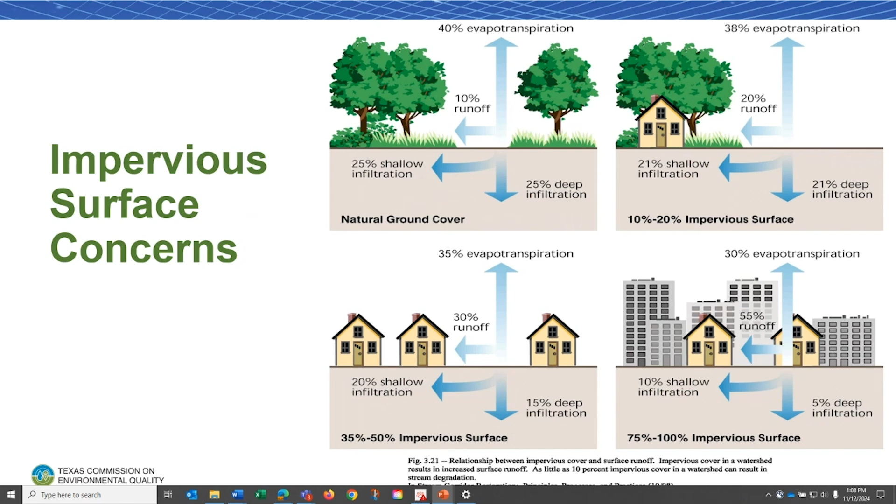So specifically, the stormwater program that we are dealing with right now is the MS4, which stands for the Municipal Separate Storm Sewer System, or MS4. MS4 is a publicly owned or operated stormwater drainage system designed to collect or convey stormwater. It includes drains, ditches, curbs, gutters, municipal streets, and roads with drainage systems.

The federal regulations are in Title 40 Code of Federal Regulations 122.26B8, where you specifically find the regulations regarding this program. Other terms you might hear refer to are MS4 operator or within the MS4. Within the MS4 is the specific area located within an urban area of 50,000 people or more. We'll go over that in a little bit more.

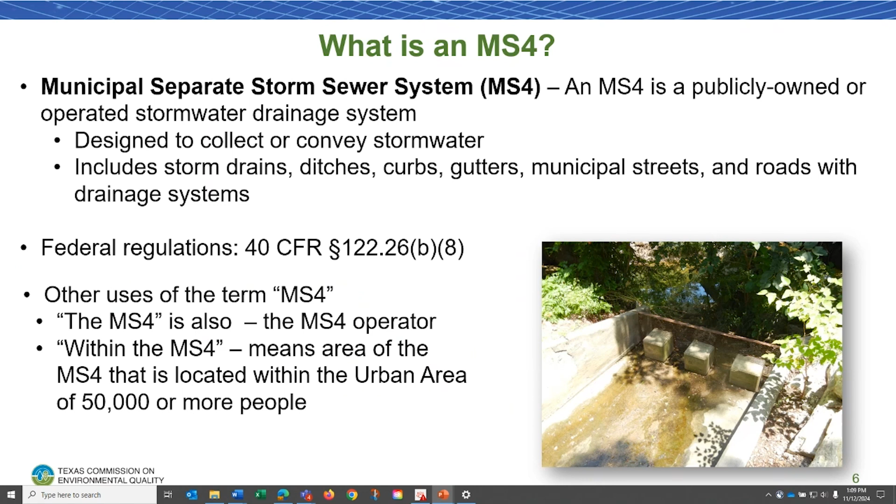We have two phases in the MS4 program. We have phase 1, which we're not going to be talking about here. We're going to be focusing on the phase 2 program, which came into play in 2000. So in order to be regulated under the 2024 phase 2 MS4 general permit, or the TXR040000, an MS4

must be publicly owned or operated, designed or used for collecting or conveying stormwater, cannot be a combined sewer, and is not supposed to be part of a publicly owned treatment works. In order to be a phase 2, it needs to be fully or partially located within an urban area with a population of at least 50,000 people or more, as determined in the 2000, 2010, or 2020 decennial censuses conducted by the U.S. Census Bureau.

So here on the right, you see a table, and in that table is the list of the 2020 urban areas in Texas. These are the only urban areas that we have in Texas, and you'll see the population. I'll explain how to read this in a little bit. This is an important table for you to know, and it's accessed through our website as well.

So the Census Bureau and the phase 2 stormwater regulations. The phase 2 MS4 program is going to regulate those areas, or that portion, that falls within the boundary of an urban area with at least 50,000 people or more. So if you're in an MS4 within an urban area with at least 50,000 people or more, then you are required to obtain coverage under this phase 2 MS4 general permit.

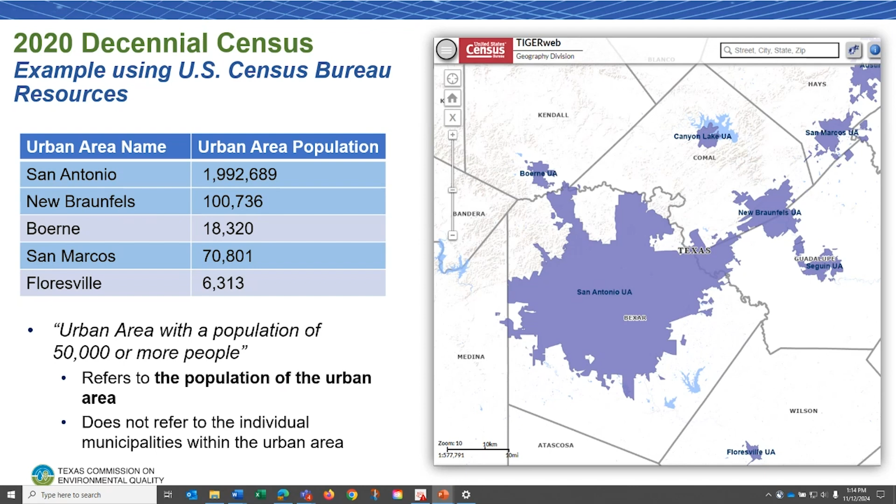So for example, New Braunfels has 100,000 people. So therefore, they are already an urban area that has that population. So anybody that's within the New Braunfels urban area is automatically an MS4 under this phase 2 program. Boerne only has 18,000, so therefore they're not of concern and they're not regulated under this general permit at this time, but San Marcos is and Floresville is not.

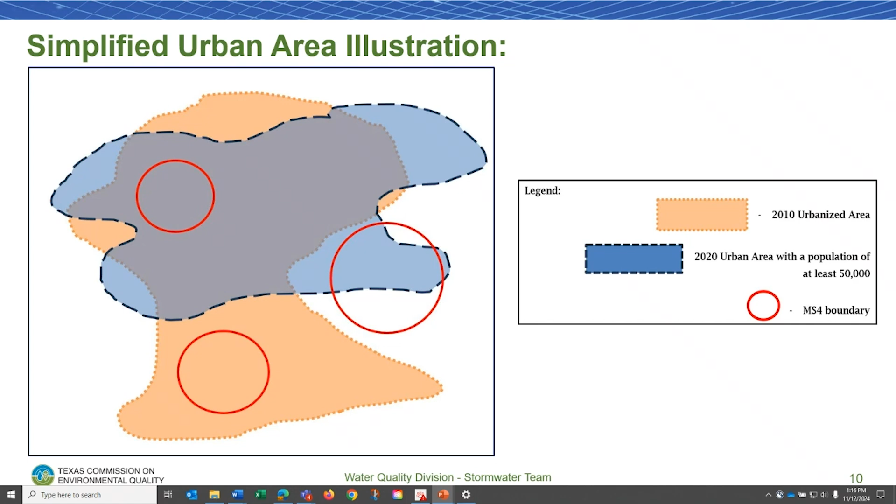So the information I'll talk to you about later really applies to whatever you decide is going to be the permitted area for you - either the whole circle that encompasses everything outside the blue area as well as what's inside it, or only what's in the blue area. Whatever you determine from the beginning will be what you need to regulate within your program.

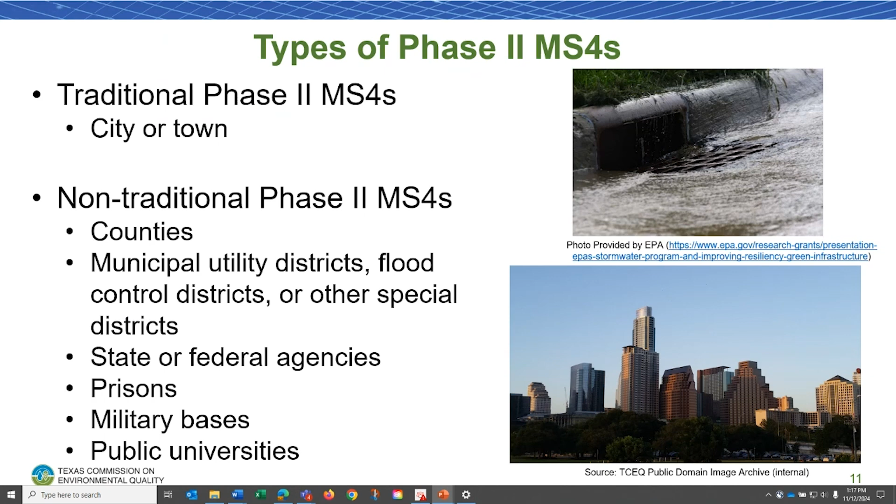Our general permit, since the last permit cycle - actually two permit cycles ago - we have been implementing a tier permitting approach. Our permit is divided into 4 levels. Level 1 is for an MS4 with an area population of up to 10,000 people, and this is for that area regulated within the MS4 area that is within the urban area with a population of at least 50,000 or more.

Level 2 is divided into level 2A and level 2B when you read the requirements. Level 2A includes the traditional MS4s, those cities with a population between 10,000 to 40,000. Level 2B includes the non-traditionals regardless of population. Level 2 also has additional requirements in MCM3 for both levels.

Level 3 is any MS4 with a population between 40,000 to 100,000. Here I'm talking about the population for all these tiers or levels from the 2020 census - it has nothing to do with the population of the urban area, it's the actual MS4 population. Level 3s have additional requirements under MCMs 3, 4, and 6.

Level 4s are our biggest small MS4s, with a population of 100,000 or more. They also have additional requirements, and they're required to implement one more MCM, which is number 7.

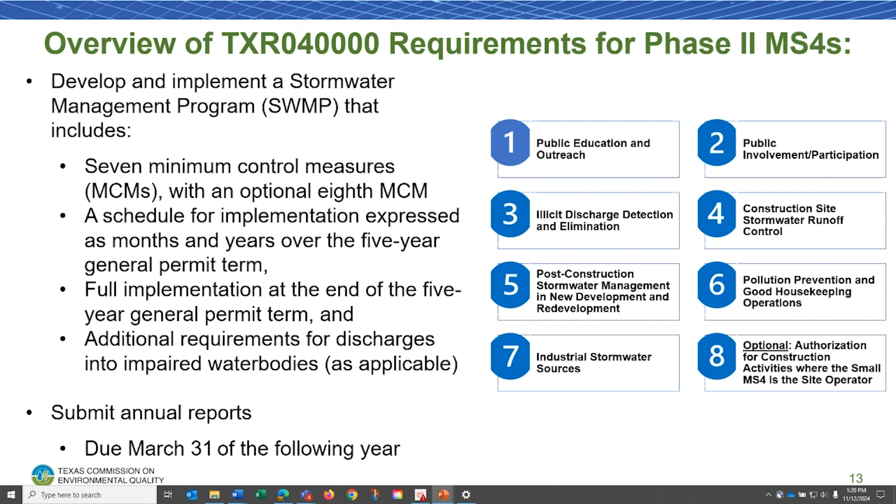A question that we get from MS4s is legal authority. As I mentioned, we have traditional MS4s. A traditional MS4 is required to develop an ordinance or other regulatory mechanism to implement their stormwater management program and enforce it within their jurisdiction. That seems to be simpler and clearer to understand because the authority is already there.

The ones where it's a little bit more complicated are for those non-traditionals because they don't really have enforcement authority within their jurisdiction. So here we've listed some types of regulatory mechanisms that a non-traditional MS4 can implement. There can be service agreements, rules and regulations, local agreements or other contracts that can be implemented with adjoining jurisdictions or counties to help enforce and implement the MS4 program within that non-traditional MS4 jurisdiction.

If an MS4 discharges into an impaired water body, then there are more requirements because that means the water body has concerns, it's sick, we need to help it, we need to protect it, we need to prevent, minimize, or remove the impairment if possible. So you need to address additional requirements in your stormwater management program and then in the annual report.

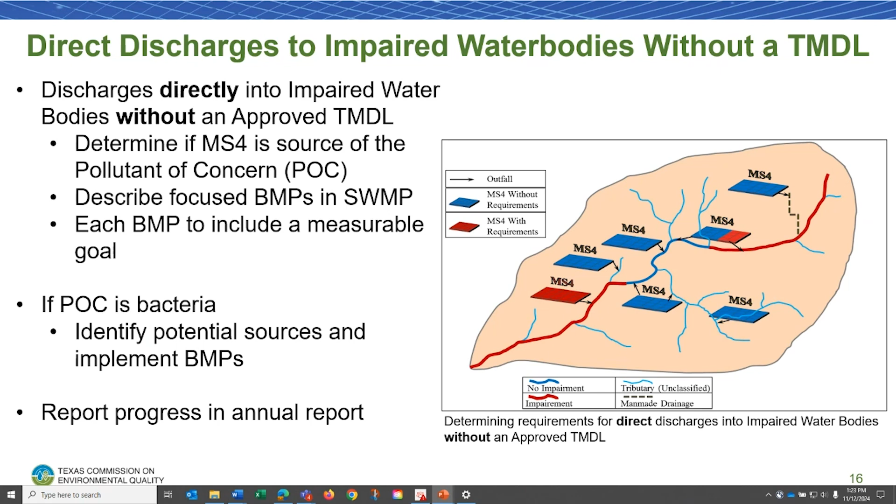This picture is designed to help you understand if you're an MS4 and you're discharging indirectly to a water body that is impaired for a pollutant of concern. But if you discharge indirectly, then you do not need to worry about addressing the requirements. But if you're discharging directly to a water body that has an impairment, then you do need to address those items in your Stormwater Management Program and annual report.

So when you are discharging to a water body that has a TMDL, then you need to determine again, is your MS4 the source of the pollutant of concern? You need to identify the benchmark. And in order to do that, that equates to the total maximum daily load's waste load allocation. So there is a document on the website that explains the TMDL, how it was developed, and it includes the waste load allocation. That's going to become your benchmark, and it is an aggregate waste load allocation. Then you need to implement targeted controls, BMPs, with measurable goals.

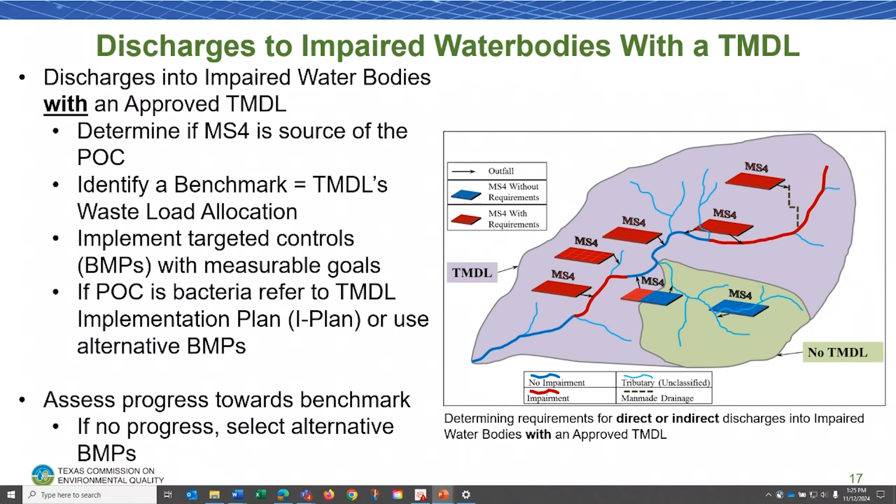Okay, so I talked to you about a SWMP. What is a SWMP? Specifically, a SWMP is a comprehensive program that's created to manage the quality of discharges from your small MS4 and for you to meet the requirements of the Phase 2 MS4 general permit. The SWMP needs to include the 7 minimum control measures as applicable and explain how the MS4 plans to achieve them.

the control measures to the maximum extent practicable, or MEP, by identifying and implementing the best management practices, or BMPs, for each MCM. Again, the 7th MCM is only required for level 4s, and the 8th MCM is optional for any small MS4 to take. But once it's taken, it becomes required.

Under the 2024 general permit, the Stormwater Management Program is required to be drafted and implemented. If you already had one, you need to update it. However, you're not required to submit that Stormwater Management Program to the TCEQ with the NOI. The previous permit terms required you to submit it. With this one, you don't, but you're still required to develop and implement it prior to submitting your NOI.

So the Stormwater Management Program that you develop for your MS4 becomes what we call your MS4 permit. That is what you're going to be implementing. Everybody within your organization and whoever else you're sharing responsibilities with needs to know, needs to understand it, and needs to have a copy of it. So the MS4 is then required to reduce the discharge of pollutants from its MS4 to the MEP, the maximum extent practicable, and also to meet the water quality requirements of the Clean Water Act.

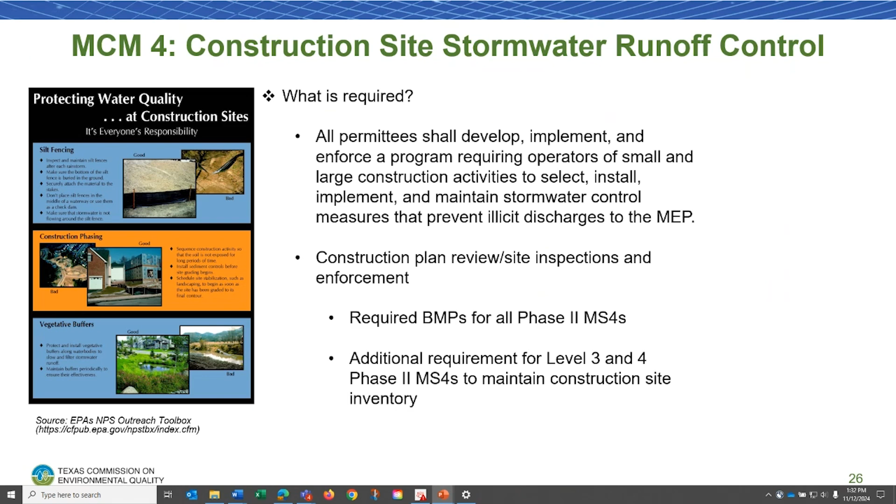MCM4 is construction site stormwater runoff control. The MS4 needs to develop, implement, and enforce a program requiring operators of small and large construction activities to select, install, implement, and maintain stormwater control measures that prevent illicit discharges to the MEP. This includes construction plan review, site inspections, and enforcement. There are required BMPs for all MS4s, and additional requirements for levels 3 and 4.

The next MCM is MCM5, post-construction stormwater management in new development and redevelopment areas. This is a program to be created to the extent allowable under the law, based on whether you're a traditional or non-traditional MS4, to control stormwater discharges from new and redeveloped sites within your MS4. Level 4s have additional requirements. If you're a traditional MS4, you need to develop and implement an ordinance, and update it as needed, or develop and implement an additional type of regulatory mechanism.

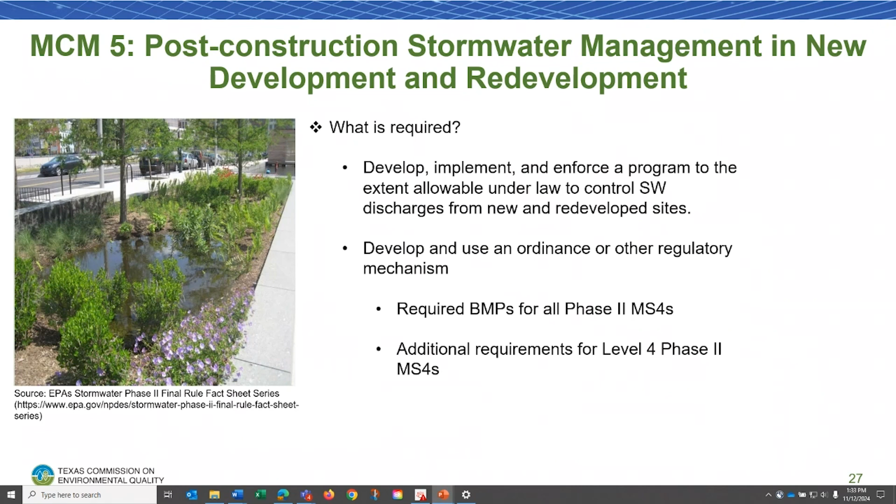MCM6 is pollution prevention and good housekeeping for municipal operations. These are the activities and operations that you as an MS4 are doing yourself. You can't just be talking and preaching, you have to walk the walk and do what the general permit requires. You need a program for operation and maintenance that includes employee training for those permittee-owned facilities, control inventory, disposal of waste material, contractor requirements and oversight, and structural control maintenance. This is something where your activities impact stormwater water quality, so you need to address it as well.

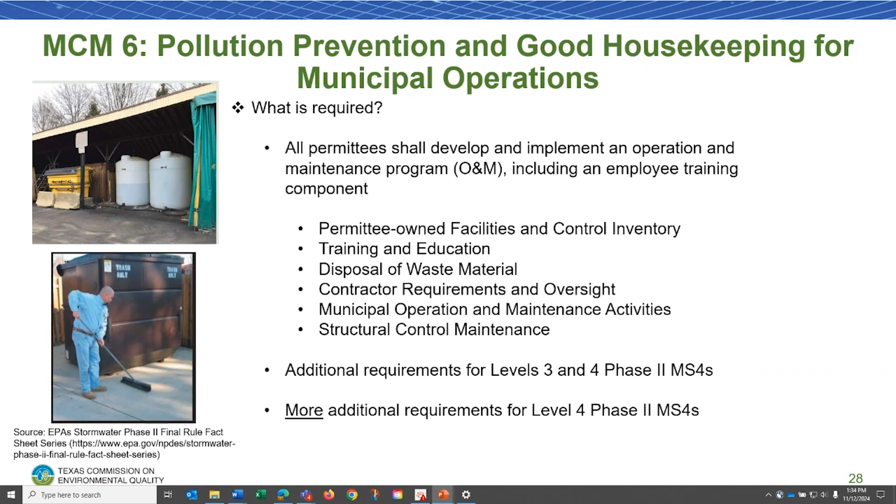MCM7, as I said, is really only for level 4s, unless you want to implement it voluntarily, which is fine if you're not a level 4. Level 4s must identify and control pollutants being discharged in stormwater from industrial sites, including landfills, municipal hazardous waste facilities, and other industrial or commercial discharges that the permittee determines are contributing a substantial pollutant loading to your MS4. You need to develop and implement SOPs for inspections of those industrial sites.

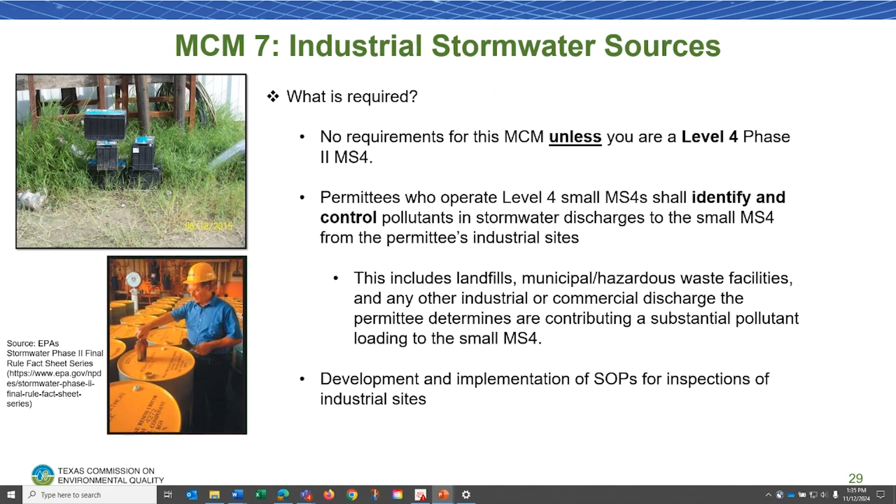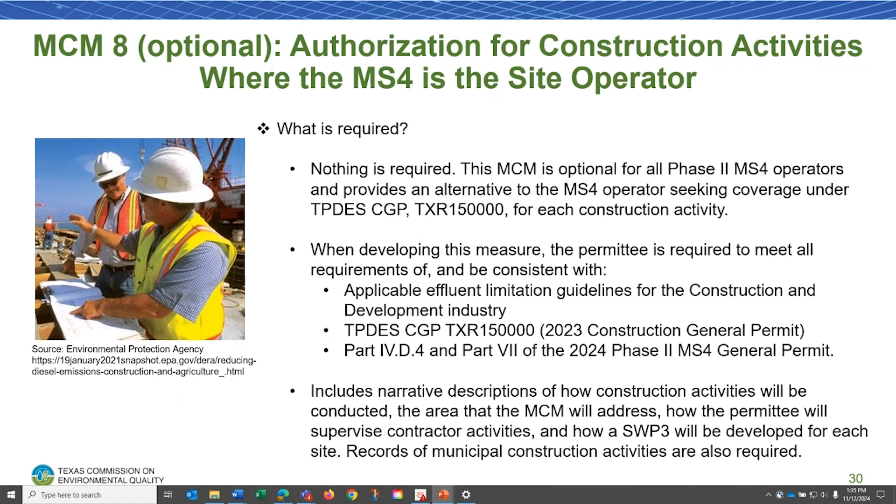MCM8 is optional, only for those that want to obtain it. This is authorization for construction activities where the MS4 is a site operator. Instead of submitting a notice of intent to TCEQ to obtain authorization under the construction general permit, you don't need to do that—you can manage it yourself if you select this MCM. But once you select it, you must implement it until you decide you don't want to, then you need to submit a notice of change to remove it. If you do select it, you need to implement pretty much everything the construction general permit says, except you don't need to submit a notice of intent to us.

So we talked about what is a SWMP, what are minimum control measures. Now we go a little bit over what are best management practices.

Best management practices include schedules of activities, prohibitions of practices, maintenance procedures, structural controls, local ordinances, and other management practices. BMPs don't necessarily need to be a management thing. They can be structural. So BMPs can be structural or non-structural controls.

BMPs can include treatment requirements, operating procedures, and practices to help control runoffs, spills, or leaks, waste disposal, or drainage from raw material storage areas, for example. Different BMPs are required to be implemented within each of the minimum control measures that we have in our general permit.

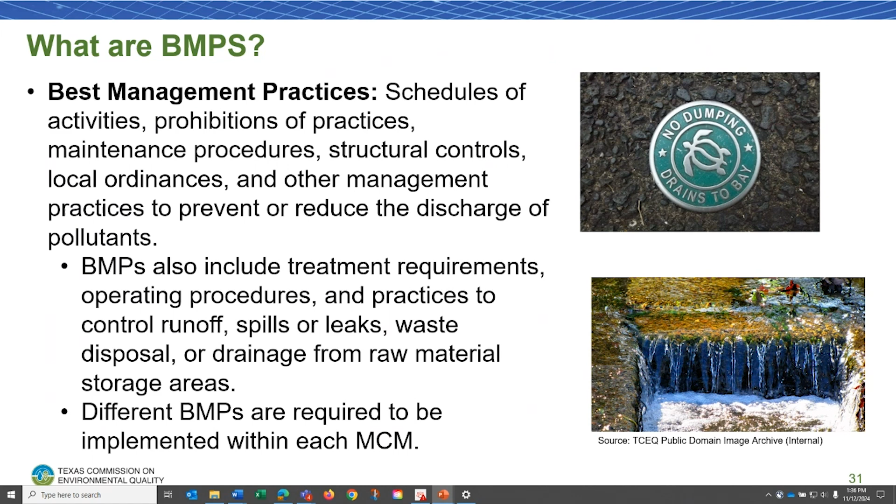Each of the BMPs or activities, as you also see them called in the general permit, include what we call measurable goals. So what is a measurable goal? A measurable goal needs to be clear, specific, and measurable. That's required by federal rule.

We need to indicate through the measurable goals how a permittee or an MS4 will be successful in implementing the various BMPs for each minimum control measure outlined in your stormwater management program. The measurable goals need to include the activity or the BMP to be completed, the quantifiable target to measure progress, and a schedule or date of completion.

So this is what best management practices and measurable goals look like in the permit. This will help ensure that your own measurable goals are clear, specific, and measurable with a schedule or date of completion. Again, this is to meet the requirements of the comprehensive general permit that we have now and also the federal MS4 rule.

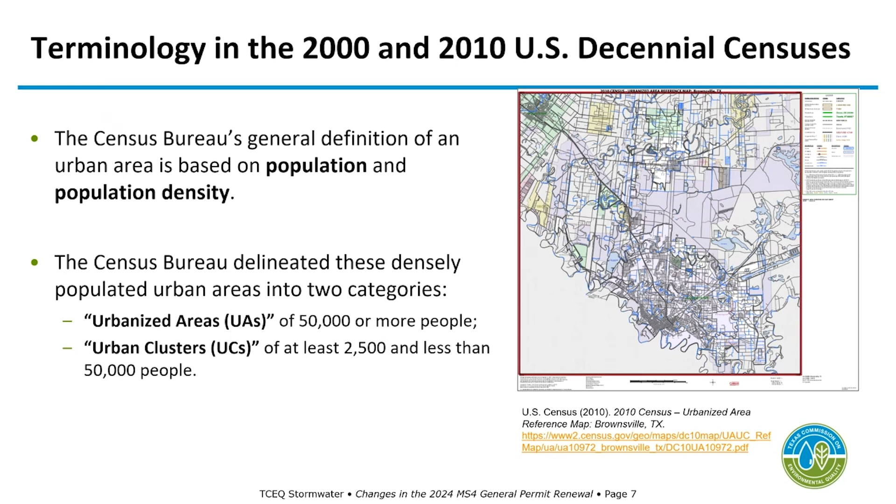So we did have terminology changes once the 2020 decennial census came about. As of March 24th, 2022, the Census Bureau did stop distinguishing urbanized areas and urban clusters and now only identifies urban areas. In response, the EPA did publish a final rule on June 12, 2023 that replaced the term urbanized area in the federal Phase 2 MS4 regulations with urban areas with a population of at least 50,000 or more. This new change requires permitting authorities to use the 2020 census and future census data consistent with existing longstanding regulatory practice.

The Census Bureau will no longer publish PDF maps of each area like they have in the past. Instead, they have published the following resources: shapefiles of the urban areas and an interactive web map with the 2020 urban areas. The TCEQ also used these new resources to determine the new MS4 universe.

The federal 2016 MS4 general permit remand rule gives states the option to administer their Phase 2 MS4 program. We do have two options available to us. Option 1 is the comprehensive general permit approach. The general permit includes all clear, specific, and measurable requirements necessary to meet the MS4 standard to reduce pollutants to the maximum extent practicable, MEP, and no additional requirements are established after permit issuance.

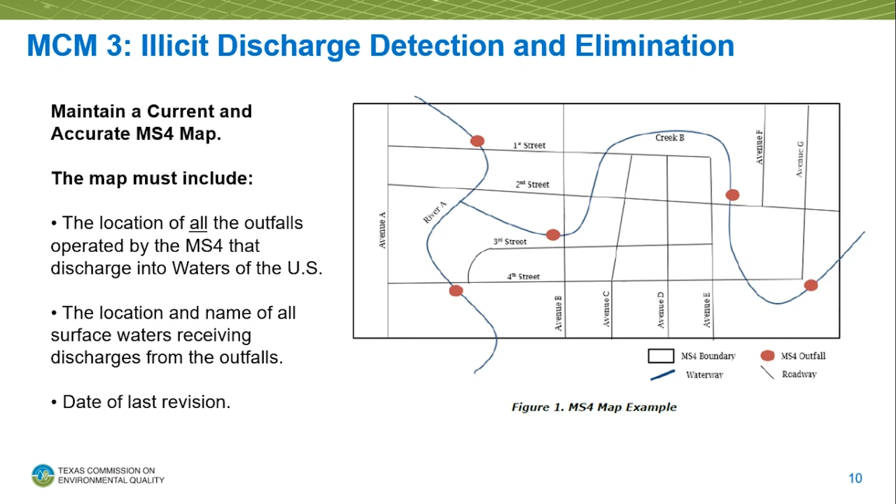One of the required elements for all MS4s is to educate and train employees on illicit discharge detection and elimination. The measurable goal for that is to conduct at least one training annually for 100% of the field staff for which that's applicable—those who may encounter or observe illicit discharges as part of their normal job responsibilities, not necessarily all of your MS4 staff.

As part of MCM3, another required element is to maintain and facilitate a public reporting method. The public needs to have at least one—you can have more than one—method in which they can report illicit discharges or illegal dumping or any other kind of water quality impacts associated with these discharges.

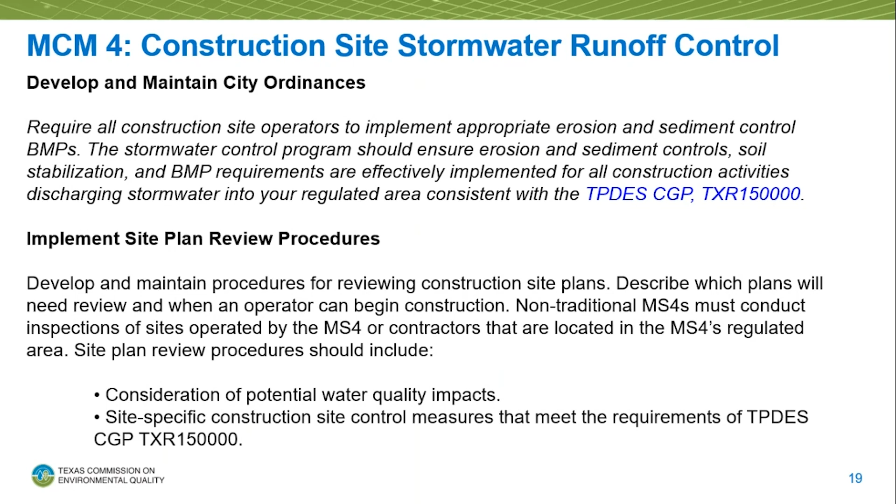As a note, you can also require and accept the Stormwater Pollution Prevention Plan, or SWPPP, for review as part of your site plan review procedures, and those need to be reviewed at least once annually.

You also need to implement site inspection procedures for inspecting active construction projects, conducting at least 80% of active construction sites annually according to your established procedures. So there's a little bit of leeway - it's not necessarily 80% of all your active construction sites, but 80% of active sites according to your MS4's established procedures.

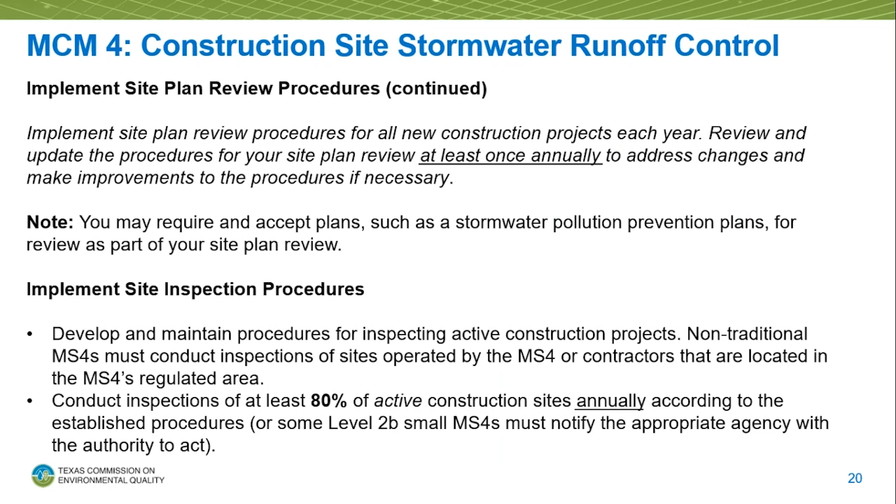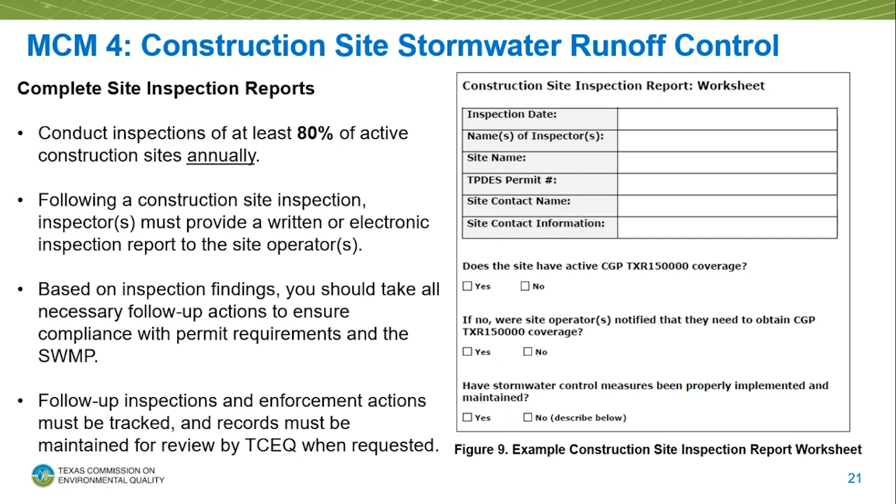Based on any inspection findings, you should take all necessary actions when following up to ensure compliance with the 2024 TXR 04, or small MS4 general permit, and your SWMP. These follow-up inspections, and any enforcement actions, also need to be tracked and maintained within your SWMP so that TCEQ can review those if necessary.

Another element for MCM4 is to create procedures for processing public comments. Similarly to the mechanism for public reporting of illicit discharges, you need to develop and implement procedures for receiving and considering information submitted by the general public. Throughout the permit term, you need to maintain at least one web page, hotline, email, or similar method for the public to submit information, and those procedures need to be reviewed at least once annually.

Lastly, one of the required elements for MCM4 is to educate and train your employees at least once annually - that's 100% of all MS4 staff whose primary job duties are related to implementing the construction stormwater program, not necessarily all MS4 staff, but 100% of those whose primary job duties are to implement that program. And of course, document and record the training activities you choose to implement.

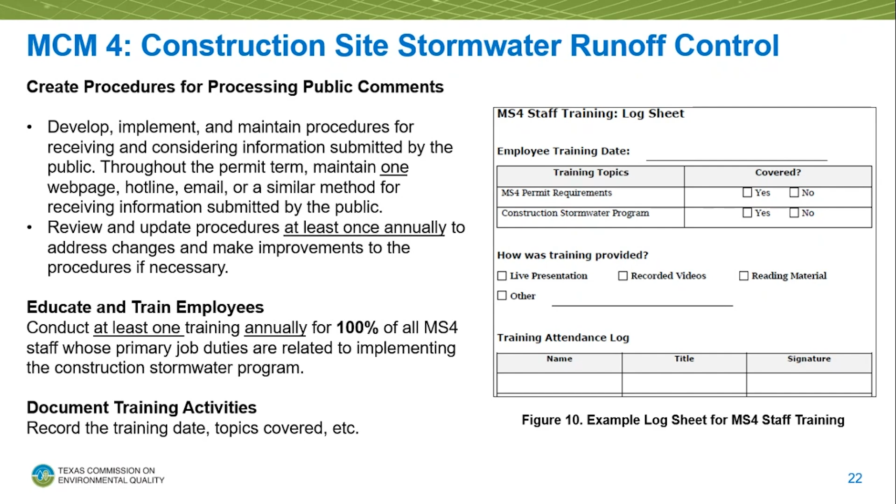On the right is an example of what that log sheet can look like, including the training attendance log and how the training was provided, or the mechanism in which it was provided.

MCM5 also has a requirement for all MS4s to develop and maintain city ordinances. You must use an ordinance or some kind of regulatory mechanism to address post-construction runoff from new development and redevelopment projects, and establish, implement, and enforce a requirement that owners or operators of these new developments and redeveloped sites must design, install, and implement a combination of structural and non-structural best management practices, or BMPs, that are appropriate and protective of water quality.

If construction of these structural controls isn't feasible due to whatever reasons, such as space limitations, health, safety concerns, or cost effectiveness, you can also propose an alternative approach to TCEQ, and we can go over that with you. Also, just like all the other procedures, these ordinances or regulatory mechanisms need to be reviewed at least once during the permit term to address changes and make improvements if necessary.

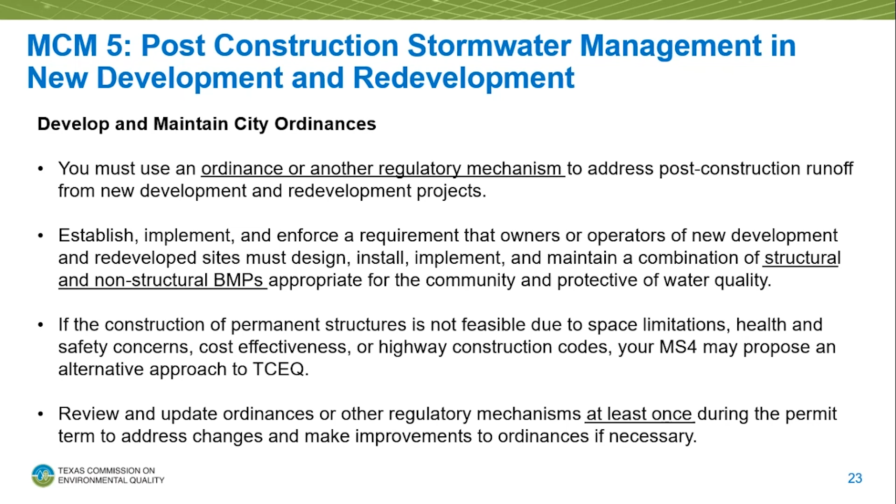MCM5 also, just like the other minimum control measures, has a requirement for record keeping - document and maintain records of any enforcement actions and make them available for review by TCEQ if and when requested. You must maintain 100% of those enforcement records that are taken each year.

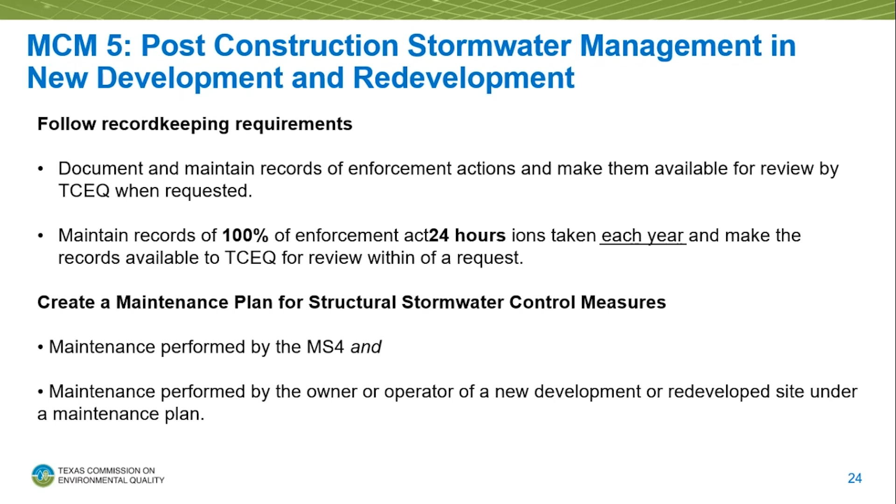These include things like recycling and composting facilities, fuel and material storage sites, landfills, hazardous waste disposal facilities, public work yards, etc. That inventory needs to be assessed at least once per year in order to address any changes to that inventory and the stormwater controls they operate.

You also need to train all the employees and any contractors, if applicable, that are involved in implementing MCM6, and that training needs to happen at least once annually. As well as developing any contract oversight procedures, if that's applicable to you, if you have any contractors.

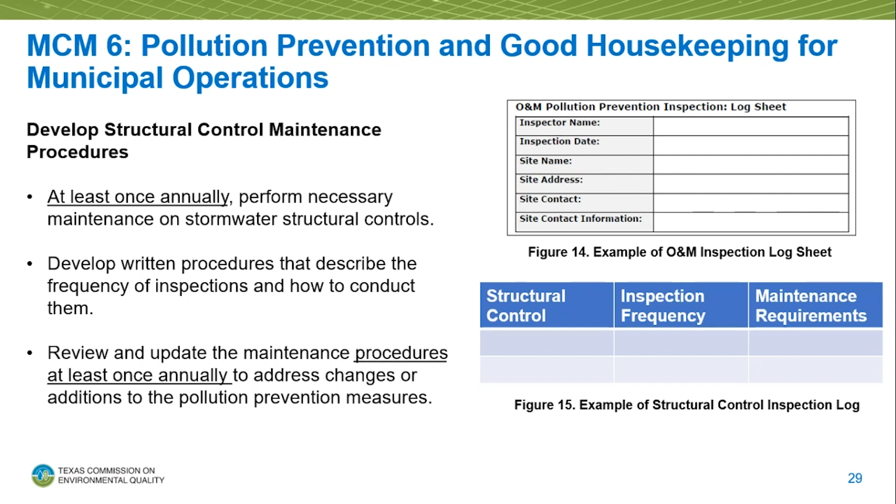And lastly, if your MS4 discharges to an impaired water body that has an approved TMDL and stormwater is listed as having the potential to cause or contribute to the impairment, then you'll need to identify the controls that you use on site to target those pollutants of concern, as well as set benchmarks and measurable goals and develop a monitoring and assessment plan. That's also included within the template as well.

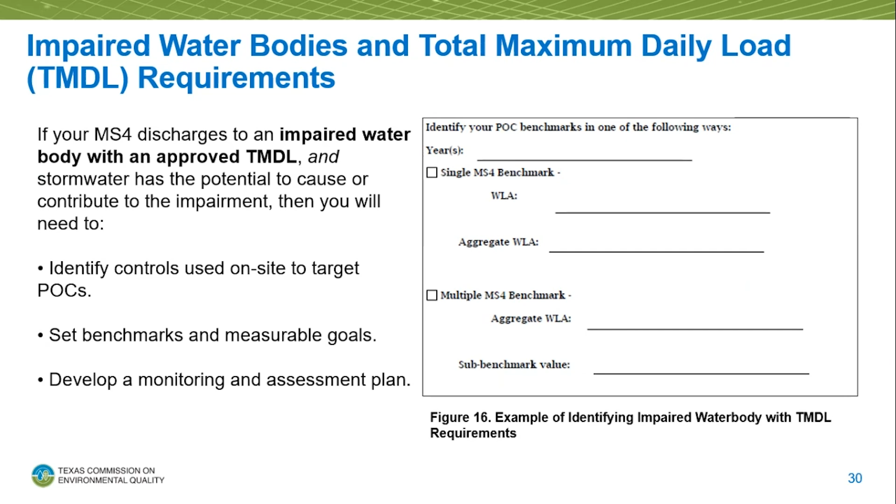All right, so I'm Casey. I'll be going over the overview of the application process.

So kind of as a review with the renewal application deadline requirements. Currently we're in the 180-day renewal period for existing small MS4s. This was to develop and update their Stormwater Management Program and submit your NOI or submit your waiver for TCEQ to review your permit coverage.

So this time frame allows applicants to firstly reorganize your stormwater management program to separate existing MCM1 into MCMs 1 and 2 as defined in the general permit, to update activities, BMPs, and measurable goals as appropriate for consistency with the comprehensive general permit, and lastly, to prepare and submit your NOI or waiver as applicable electronically in the new Net MS4 system.

As far as newly regulated small MS4s, application and deadline requirements, they still follow the newly regulated small MS4s. Once confirmed, will be required to submit the application within the 180-day renewal period. Once again, this time frame allows applicants to both develop their stormwater management program as defined in the general permit, include activities, BMPs, and measurable goals as appropriate with the consistency with the comprehensive general permit, and then give you time to prepare and submit your NOI or waiver as applicable electronically in the new MS4 system.